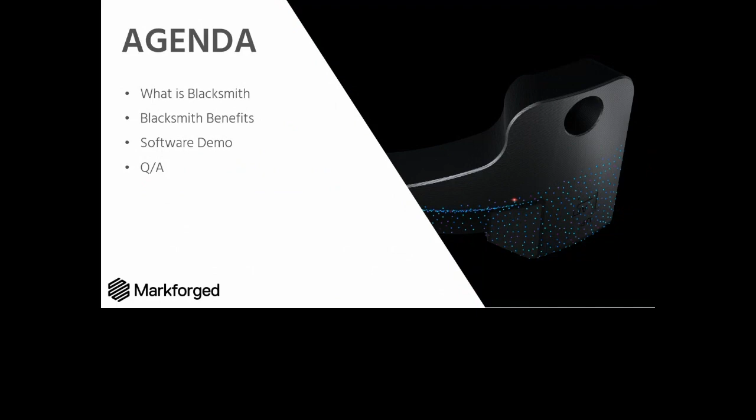So for anyone here who doesn't own a Markforged printer or isn't super familiar with Markforged as a whole, the company itself was founded in 2013 and was built on the question of what if we were able to make a printer that could create parts strong enough for end-use applications. Their headquarters is in Boston, and even though they do have a global presence, all of their hardware, materials, and software is designed and manufactured in the United States. Markforged mainly operates through a partner support model, which essentially means that they have partners like Hawk Ridge Systems sell and provide support or training for their products.

Now, you'll notice that I did mention materials and software instead of just hardware, and that's because Markforged focuses on more than just building solid printers. They built their own print preparation software, which is called Eiger, and Blacksmith is actually incorporated into Eiger itself. Their software is also the only 3D printing software that has ISO 27001 certifications, which basically means that it meets some really high privacy and security standards.

Markforged also develops and creates all their own materials. And because it's built for their systems, you can really easily swap new materials into a printer without needing to mess around with stuff like temperature settings or feed rates like you would on a hobbyist machine, because Markforged does all that stuff for you.

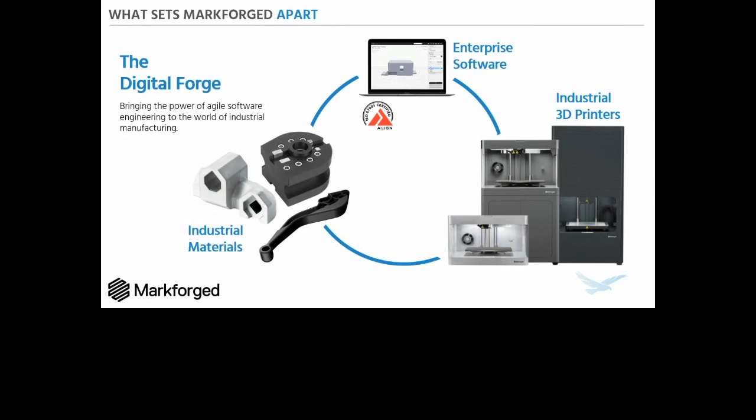So moving on to one of the most important questions of today's session, what actually is Blacksmith? And while we go over that, I'm going to launch a quick poll here asking if anyone has ever needed to verify the accuracy of a 3D printed part before they actually used it. Now, from that poll and the actual title of this presentation, it's pretty easy to guess that Blacksmith is an in-process inspection software for the X7 Industrial Series printer. What that means is that while parts are being printed, they are scanned every layer for accuracy. And because this happens while a part prints, users don't actually need to do anything during or after the fact in terms of additional input.

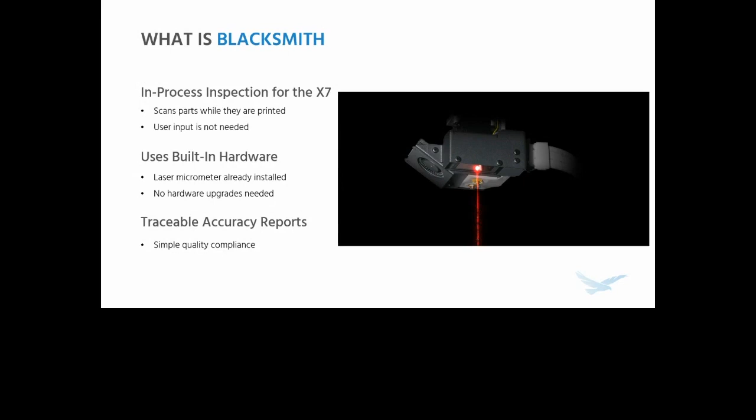For anyone who has seen or actually owns an X7 machine, you'll remember that the print head already has a laser micrometer built in, which is super useful for print bed leveling and calibration. Blacksmith actually makes use of this laser, so there's no hardware upgrades or anything like that to the machine itself. Every X7 is compatible with it. Now, when a part is scanned, Blacksmith actually stores the accuracy reports within Eiger for later viewing. This means that there's an actual verifiable paper trail for QCing 3D printed parts, and they don't have to be measured or inspected after they are printed, so they're ready to go right off the bed.

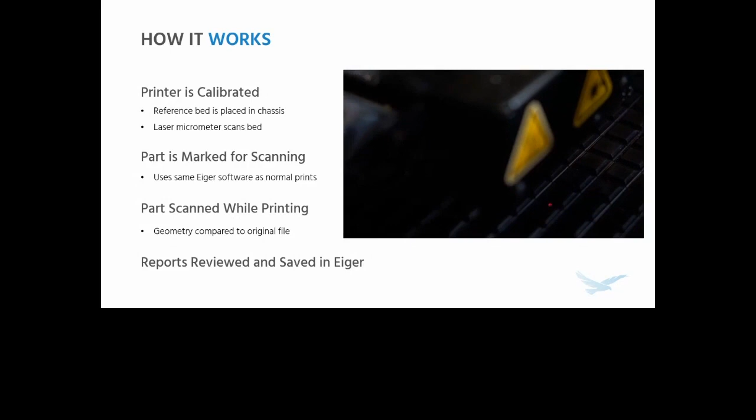Now, like I was just mentioning, Blacksmith requires no additional hardware upgrades to the X7, so how does the software actually work then? Well, the whole process is really simple, and it starts with making sure the laser is calibrated to scan parts. This is done by placing a provided reference print bed on top of the normal print bed, and the print head laser then scans the bed automatically, and it calibrates itself while doing so. This is a one-time deal unless you move the machine or change to a different print bed for whatever reason. And the calibration only takes about 30 minutes, with the only user input being starting and closing out of the calibration utility after it's complete.

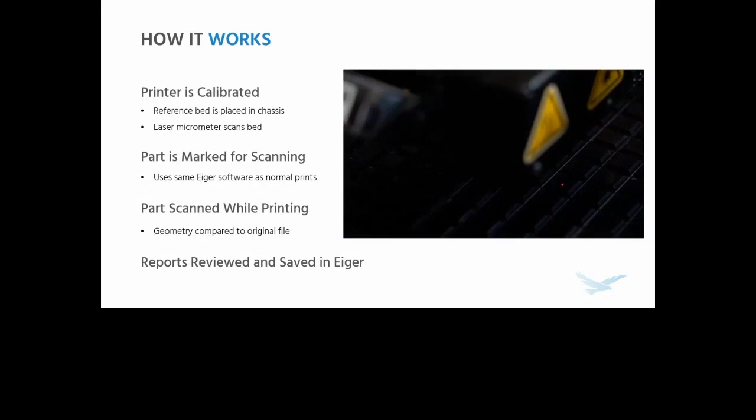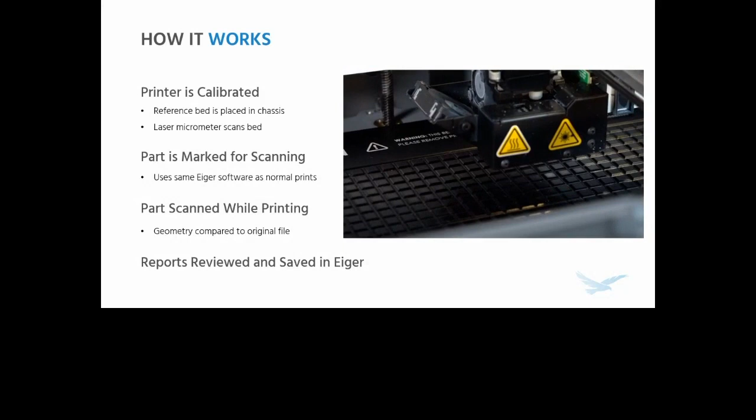We'll go over this part in a bit, but the next step in the process is importing parts into Eiger, like you normally would do before a part is printed, and then toggling Blacksmith to scan them. When a marked part is printed, the printer will scan it, and Blacksmith will compare the geometry of each layer to that location on the original part file. And lastly, the history of reports for that file are stored in Eiger so that they can be referenced at any time after the part is printed.

So that all sounds simple enough, right? But what are the actual advantages to someone using Blacksmith? Why would you use this? Well, the easiest one to see is that it removes any quality control process from the equation of getting a part from printer to application.

The last 18 or so months have really shown how important turnaround time can be. And if you have printed parts immediately going to a quality control queue, which could be backed up with other parts already, then you aren't really getting the full benefit of a printer.

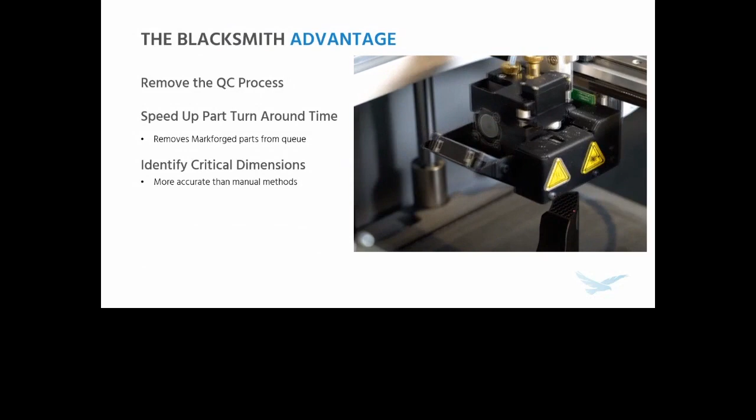And another point here is that there hasn't ever really been a standardized process for quality checking critical dimensions of 3D printed parts. So some companies have them measured with calipers, some companies scan them, but it all takes time and the process might miss a critical piece of geometry.

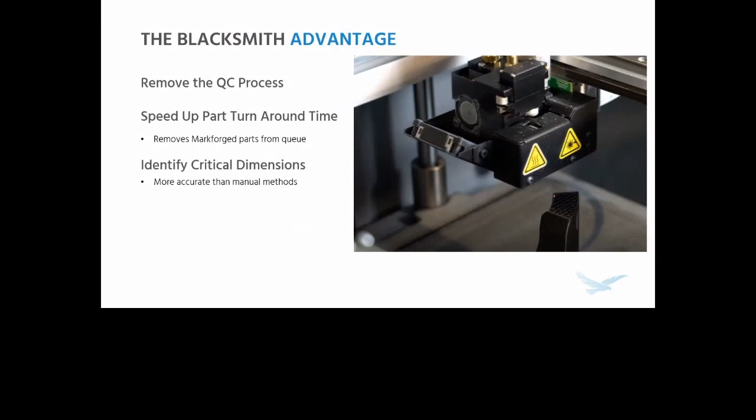3D printing adds another layer of complexity to quality control too, because even if there's a quality control process already in place, if parts get mixed up with each other, there's no real way to guarantee that they all have the same internal print settings like fiber or infill percentage.

Blacksmith is extremely useful on this end because parts are locked before being printed, which means their settings can't be changed in any way. So in turn, this means that each follow-up of that same part already has documentation that no print settings have been altered.

Now, each time a Blacksmith part is printed, the scan report is timestamped and archived. So if someone in your organization, say, wanted to view past reports, it's really easy to either download a scan report and send it to them, or just give them access to Eiger and let them view scan history if that's feasible for you.

And like I mentioned earlier, Blacksmith scans each layer of a part, so there's no chance of missing measurements on a critical dimension or piece of geometry like you might if someone was measuring them by hand.

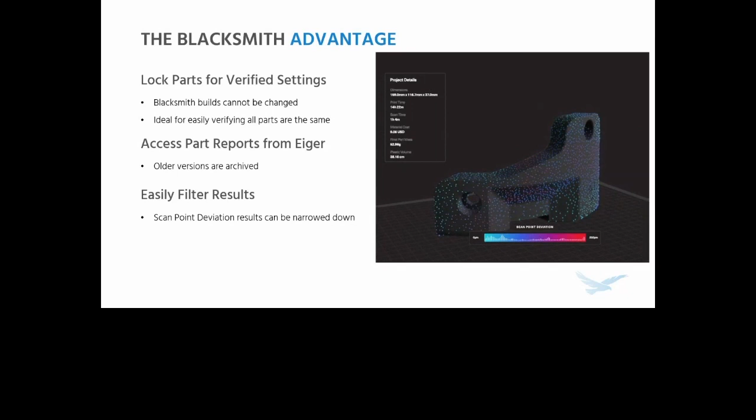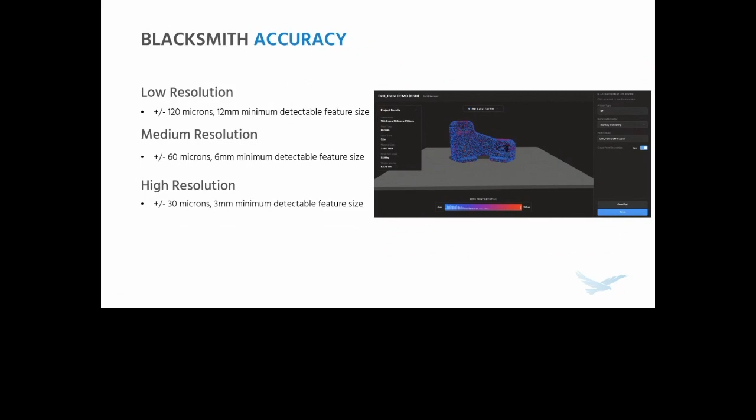Now, Blacksmith does also have different scan settings, because if you're printing something like a soft jaw, you probably don't need to scan at the highest resolution, because there's not usually any small features on something like that. So if you need to save a few minutes and get a part out the door, but you still need to scan it, you have that option.

All right, so I've gone over enough slides, so let's go ahead and take a look into how Blacksmith works on the software side. So I've switched over to Eiger, and here we have an STL of an impeller part. For anyone who hasn't used Eiger before, it's really simple to use, and Blacksmith really doesn't change that trend with it being a slider to toggle on and off for parts.

So I'll go ahead and do that here, and when I turn on Blacksmith, you can see that the options for those scan resolutions I was talking about pop up. I'm going to go ahead and set this to high, and then slice the part, and the scanning is automatically added while the part is being sliced and pathed as we speak.

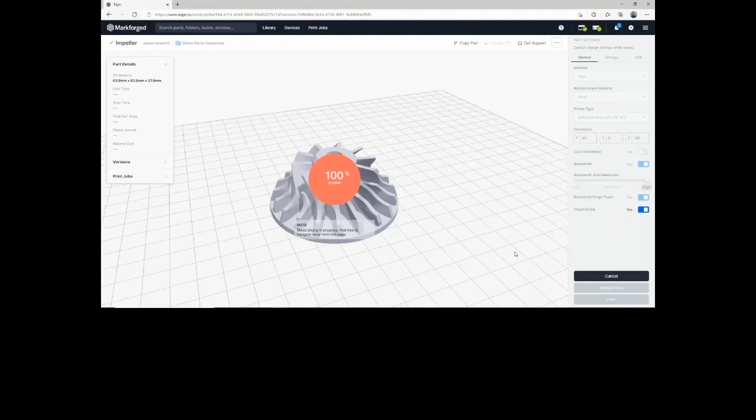So just as a reference, the medium resolution scan that this part was set at first was about 19 minutes of added scan time on top of the print time. And once this is done, you can see that adding even high resolution scans doesn't really have a huge impact on print time, with this being about 36 minutes of additional time here.

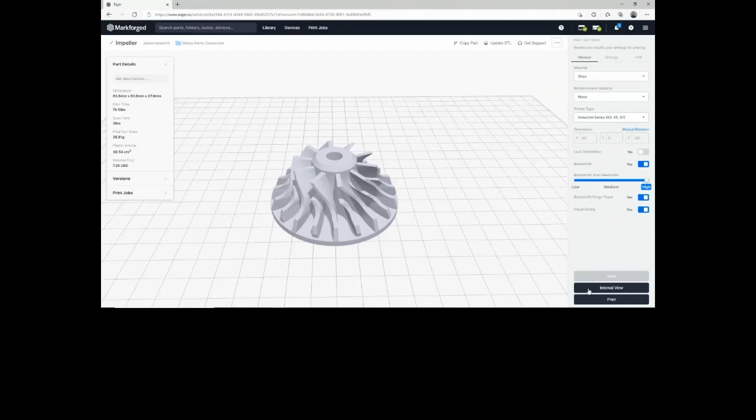Okay, so now the part is marked for scanning, and we would be able to print it just like any other part, but we're going to go the daytime cooking show route and skip that part so we can go to the Blacksmith scans area.

So over here on the left, you can see there's two areas. The first is parts, which is basically just every part that has been toggled for Blacksmith scanning. And then there's builds, which is parts that have actually been printed and scanned. So we've printed that impeller part with Blacksmith, like I said. So I'll open it here so that we can take a look at what you actually see with Blacksmith.

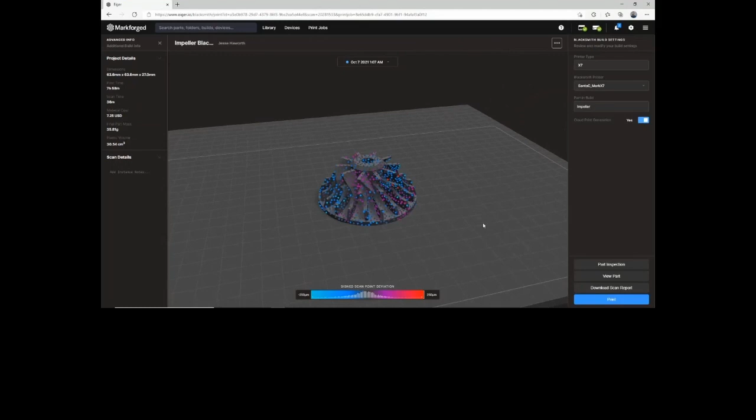Now, because Blacksmith exists within Eiger, you'll see some familiar information, and the navigation controls are the same, just mouse wheel zoom in and out. But you can see that the part is covered in a bunch of scan points showing the deviation of that area of the part. If I want to filter for specific accurate results, I can do that with this deviation bar. So let's filter for results that deviate by 135 microns, which is a bit over 5 thou.

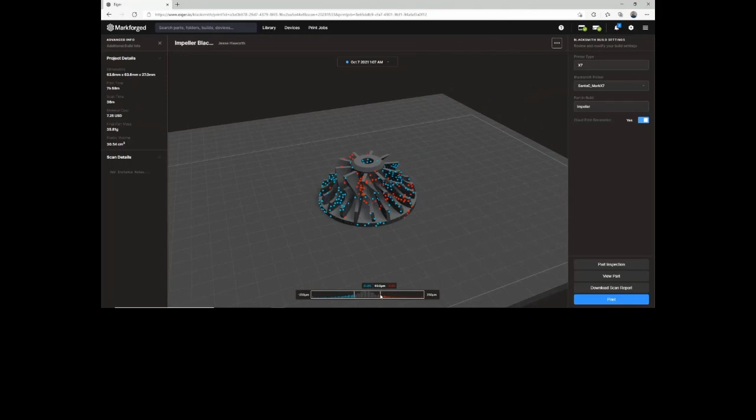And you can see what points on the part are above that range and what percentage of scan points that is, which is really low for this part. And I can change what I'm looking for really easily, filter for different results if I want to as well. If I don't want to view signed results, I can change it to absolute and then filter those results in the same way too, whichever is easiest for the user to look at.

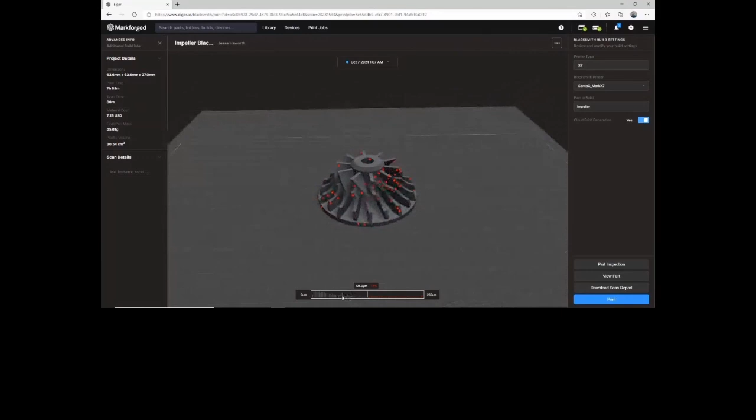And same as the signed results, I can filter for areas that are outside of a specific accuracy really easily, and then rotate the part to get a better look at my geometry and those results. You can also filter by the surface deviation of your geometry if scan points isn't what you need, and filter those results the same way that you would with scan points.

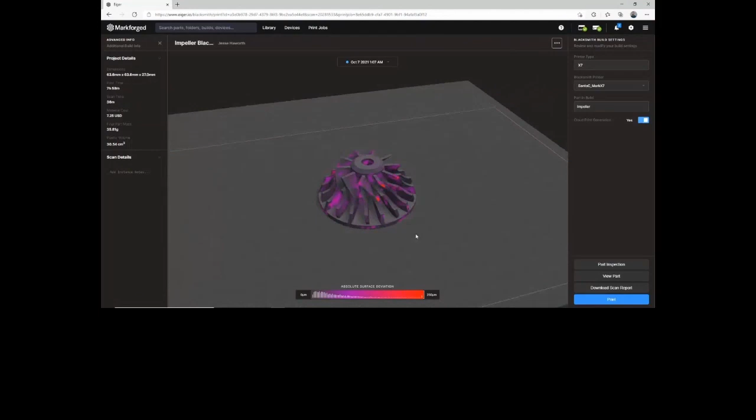So basically, it's really easy to find what you're looking for in a way that's easy for a user to interpret. This is a little bit much to look at, so for now I'll just switch back to what we initially had set with the results displayed as, which was signed scan point deviation.

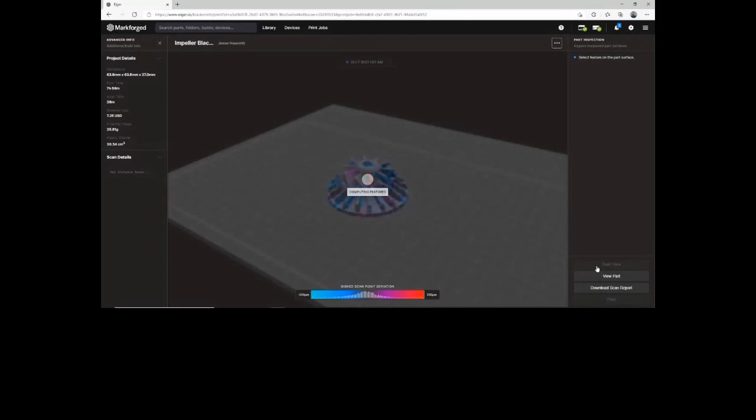Now, one other mode that Blacksmith has is for part inspection. And what this does is it allows you to look at a bunch of information for a particular surface, which is really helpful if you have something like a hole that you need to know the accuracy of. You can also compare different surfaces as well. I'll just click on a few here, which could be useful for something like comparing the diameters of two holes, inner or outer diameter, or the difference between two similar shapes.

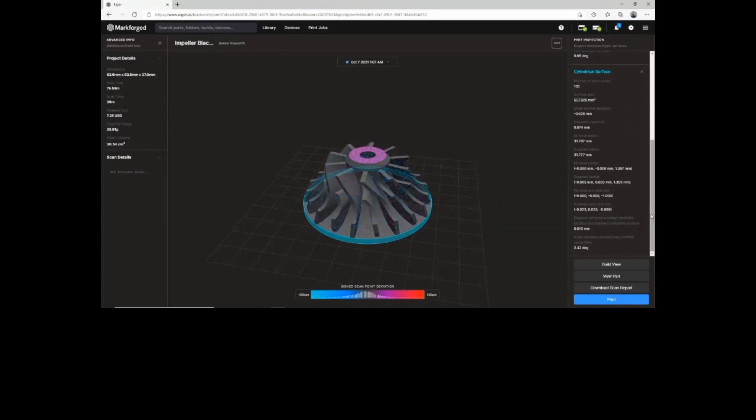And then Blacksmith also gives you a bunch of useful info like the surface area or standard deviation for whatever surface you select. And if you do accidentally select a surface, you can just remove it from the list here on the right-hand side. I'll just go ahead and remove these surfaces that I just selected here.

Now, probably the most important part of Blacksmith is being able to export these results, because it might not always be feasible to have the QC staff as part of your Eiger 3D printing organization. These reports are huge because not only do they list the part name, how much material was used, and the exact print settings, but they also list process control stuff like what exact machine the part was printed on and what timestamp the print finished.

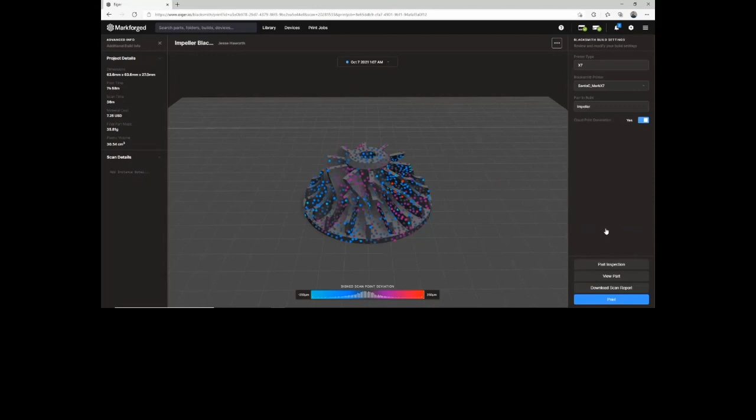A lot of the deviation data that I was just showing is in these reports as well. And if you do have multiple prints of the part, each of their scan reports can be accessed through the timestamp drop-down menu, which I have selected here at the moment.

Okay, so we've gone over a bit about Blacksmith and how it's a really, really good tool for actually verifying how accurate a part is, and how, in general, it's a really great solution for just getting printed parts to their application faster. But Markforged is actually going to take this one step further. And with Blacksmith, they will be incorporating machine learning so that the printer will be able to identify geometry or areas of a part that might be out of spec and adjust print settings for follow-up attempts.

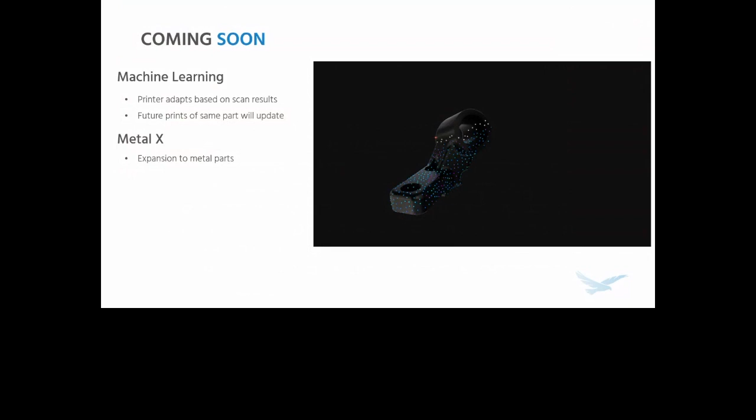And like I was showing, each of those reports will be accessible, so you'll be able to document and verify really easily what areas of the parts are becoming more accurate. And right now the software is being used on the Markforged X7, but they do want to bring it to the level of verifying Metal X parts as well, which is going to be a massive help for getting fully 3D printed metal parts into the hands of users quickly without sitting in a quality control queue or something like that.